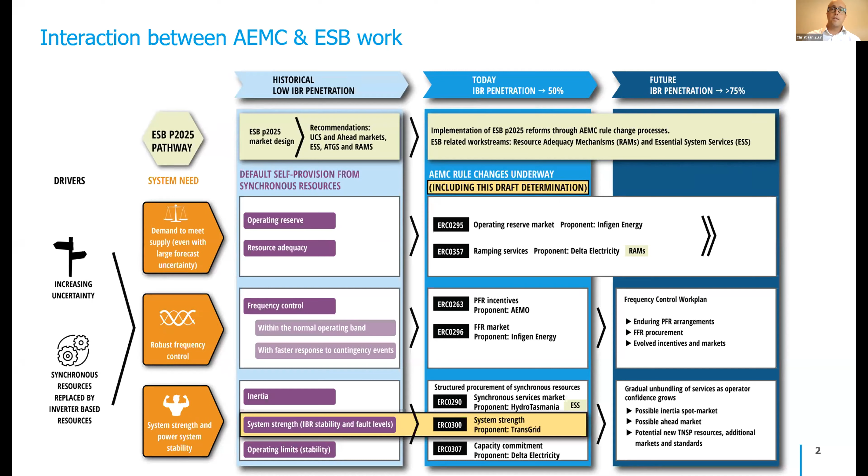So just very quickly, the work that the AEMC is doing on system strength is very closely related to the work that the ESB is progressing. There are 4 key essential system services: operating reserves and resource adequacy, frequency control, then inertia, and then the 4th one is system strength, which is about IBR-related instability, as well as the provision of minimum fault levels. And the AEMC is progressing that work through its review and then this rule change.

So there are 3 key components to the draft rule that was made a couple of weeks ago now. And these are consistent with the recommendations that we made at a higher level last year in our review of system strength frameworks. So we've divided it up into what we're calling the supply side, the demand side, and a coordination mechanism, being the pointy-headed economists that we tend to be at the AEMC.

So on the supply side, really this is about the proactive provision of system strength. So you have sufficient volumes of this critical service where it's needed, at the right locations, and most importantly, that it's there when it's needed. So you don't get the kinds of bottlenecks that we've seen with system strength over the last couple of years.

So the fundamental component of the supply side is a TNSP-led procurement or provision of system strength. And this will basically take the form of a system standard that TNSPs will be required to plan for and meet. And a critical input into this standard will be AEMO's projections of IBR connections in the future. And basically, TNSPs will be required to work closely with AEMO to proactively provide the needed volumes of system strength so that these projected levels of IBR can be expected to operate stably under normal conditions.

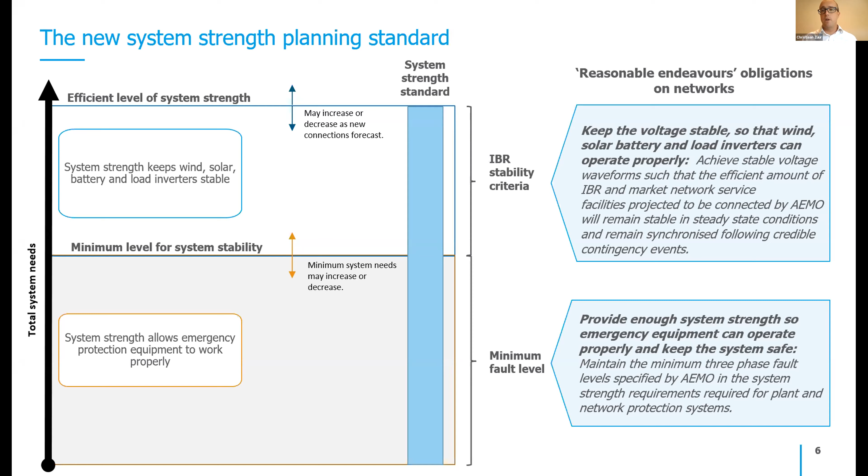The second component of what we're doing is the system strength charge or system strength mitigation requirement. Three components of the charge: the system strength price, which is developed by the TNSP providing system strength in accordance with guidelines from the AER. And that's really based on the long run incremental cost of providing system strength.

The system strength locational factor reflects the fact that system strength is a highly locational service, and that'll change according to where a generator elects to locate. The closer you are to a node where system strength is being provided by the TNSP, the lower the charge will be. Now, both of these components try to balance the need for predictability with flexibility, and so both of these components are fixed for a 5-year period.

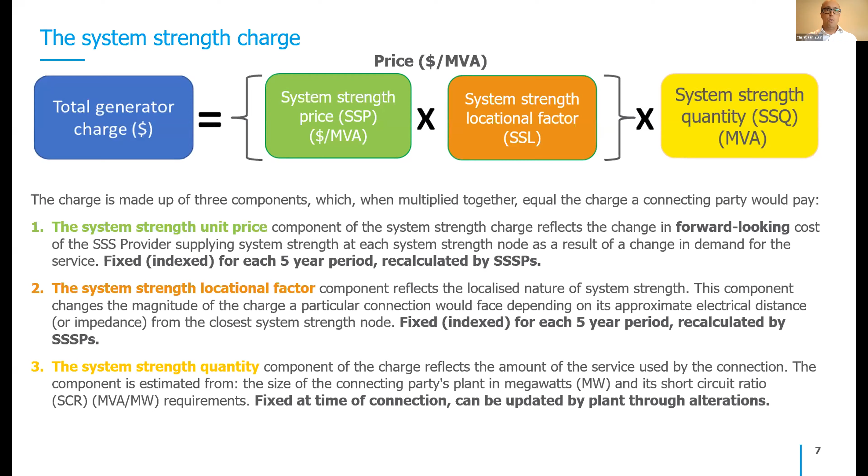The third part of the charge is a system strength quantity, which can be controlled by the connecting generator. And that's really about how much system strength the individual plant actually requires. And as mentioned, the generator or the connecting plant can actually change that by altering its plant as needed.

So fundamentally, this SSMR, system strength mitigation requirement, gives generators a choice. They can either pay the charge and make use of that centralised provision of system strength, and that means that they only need to go through the PIA process rather than the full impact assessment process, which we understand should make things a lot faster, a lot simpler for those generators looking to connect and pay the charge. If the generator elects to self-remediate, it does need to go through the existing FIA process, undertake system strength remediation works and/or contract with another party.

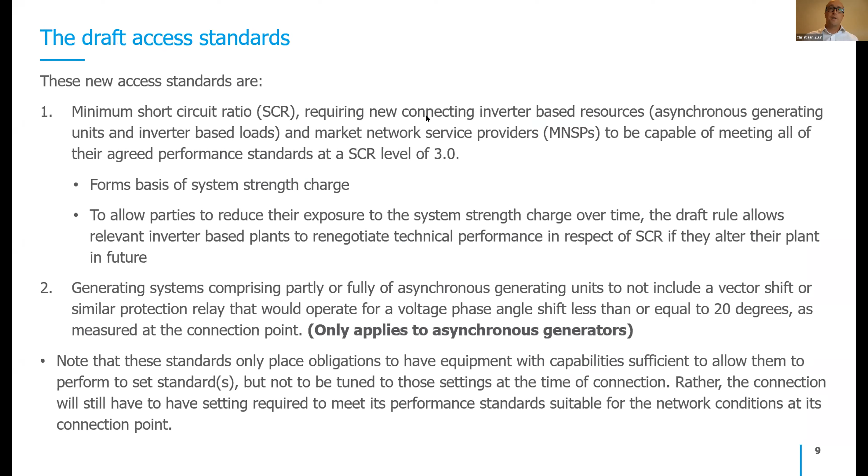Two new access standards. I won't go through these in great detail. A minimum short circuit ratio requirement for stable operation down to SCR 3, as well as a requirement on minimum vector shift protection obligations. I'm happy to talk further about these offline, but thought I might skip to the main things that I think people are interested in to talk about today.

So grid-forming inverters, we think, offer a great deal of potential when it comes to the provision of system strength. I mean, as Chris talked about here, we think that grid-forming inverters may very well provide a lower cost alternative to syncon build.

It can also allow IBR to value stack, to both reduce their own demand for system strength, potentially reducing that third component of the charge to zero, and therefore avoid having to pay a charge. It also means that the generator potentially could offer network support agreements and actually help the TNSP in the proactive provision of system strength by providing their service to help to stabilise the voltage waveform.

Now, obviously, there's still a bit of work to be done to actually allow this to occur. As Chris mentioned, there's a lot of work to be done thinking about how to standardise such a product to perhaps better define the nature of the service that's being procured. But at this stage in the draft determination, we've left it reasonably open to say that the TNSP can engage with any party who can demonstrate, in accordance with AEMO's System Strength Impact Assessment Guidelines, which is a document that AEMO sets up about how to provide system strength, that they can support the TNSP, and they can then sell those services to the TNSP.

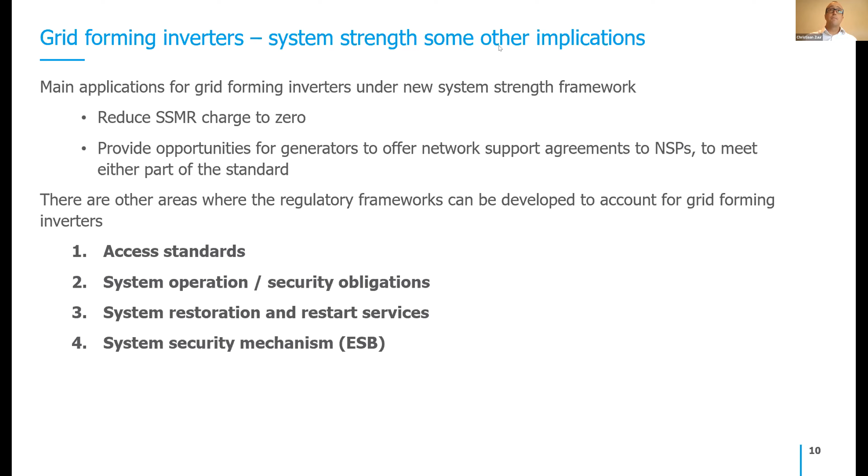Thanks, Christian. Again, I think some really timely and important work that's going on, and some clear synergies with what ARENA are hoping to do as well. So now I'd like to hand over to Dan Starrick, who's an investment director in our business development and transactions team here at ARENA, and he'll moderate the Q&A session, which thankfully we've got a little bit more time for, because Chris and Christian have gotten through quite quickly. So I'll hand over to Dan.

Fantastic. Thanks, Carl, and thanks, Chris and Christian, for some really good introductory presentations, which I think set the scene really well for the second half, as we get into some of the projects that we're going to be talking about. To set the scene at a slightly higher level before we get into some very technical questions that are coming through in the Q&A, so no surprises there.

I think the scene that's been set here is that the technology is developing fast. As we know, that's what this sort of technology does. It moves quite quickly, probably ahead of regulations. We've got the regs developing in parallel. We're talking about 2025 and really getting ready for that next phase. And the need is growing, and renewables are growing, which is obviously great, but creating challenges.

So question to maybe Chris first, and then to Christian: how important are advanced inverters in this context? We've got technology coming through fast. The regulations might take a while to really settle into what the technology can do. Can you just give us your sense of how important you think this area is? And I guess obviously very complex, but how important is it that we get this right and work together to solve these challenges? Yeah, look, I think very important is the short answer there.

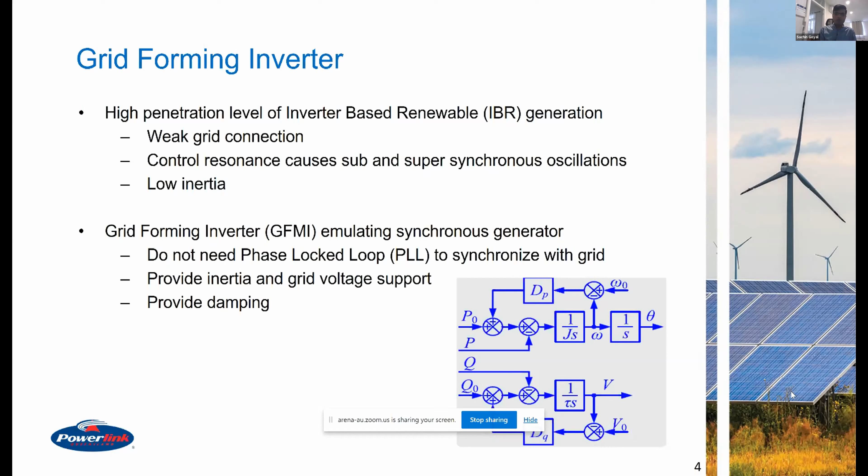It can also provide some synthetic inertia to the system, and in simple terms, it should be able to reflect the capabilities of synchronous generators to some extent. That's what we mean by grid forming. And the differentiation between grid forming and grid following here is that we are not relying on a grid to create the reference.

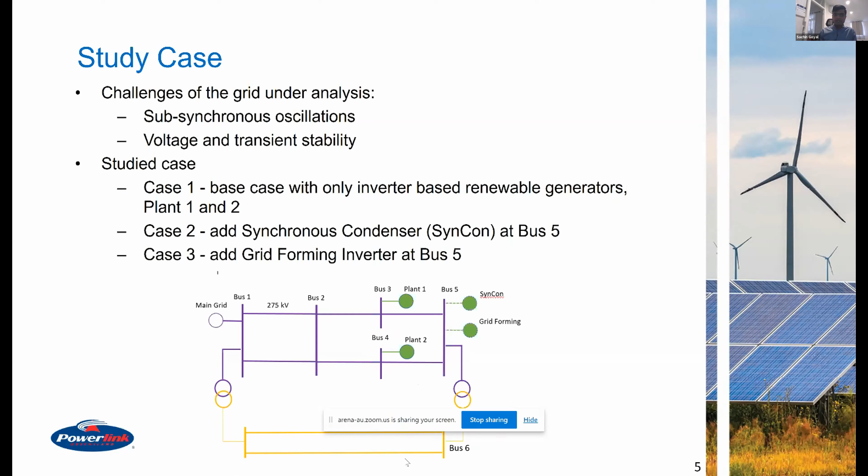In the third case, we took the synchronous condenser out and put a grid forming battery and compared: can a grid forming battery solve the problem similarly or in some cases better than a synchronous condenser? In this network, this represents the 275 kV network, and in parallel, there is a 132 kV network. In the results, I'll talk more about the impacts of 275 kV and 132 kV.

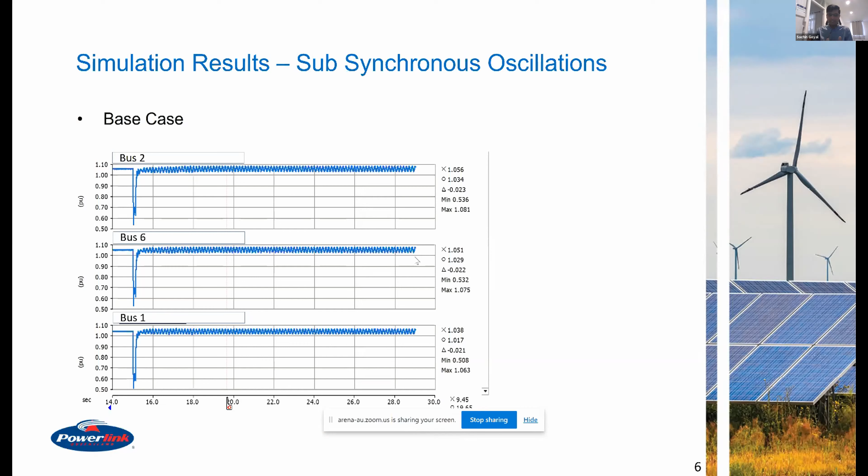Right. So when we connect a couple of renewable plants without any support, after a contingency, we see some control interactions. And those control interactions are not new to the NEM. Some of you are quite aware of those 8 to 10 hertz oscillations in the NEM. We have seen those in Queensland, Victoria, and everywhere in the NEM, right? So this is exactly what we see here.

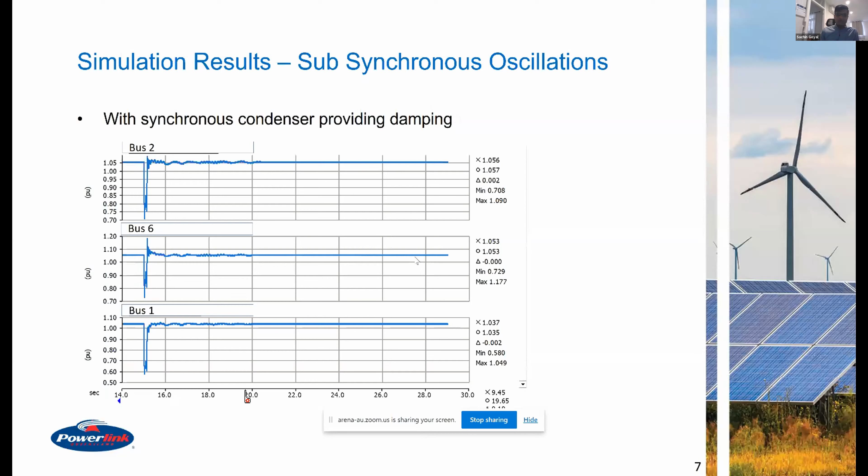And then we connected a synchronous condenser on to a close by bus, and then see, can a synchronous condenser help mitigate those control interactions, which are those 8 to 10 hertz oscillations. And as you can see from the results here, the synchronous condenser is well capable of mitigating those control interactions.

Then we took the synchronous condenser out and put a grid forming battery here. Obviously, tuning of the battery is required, as it's required for any other project, including a synchronous condenser. But what I'm showing you here is that a battery operated in grid forming mode can also solve the control interactions problem, which was solved by the synchronous condenser.

The other point I would like to mention, we did further tuning of the grid forming battery. And what we found is that if we put enough effort behind the tuning of the plant, the size of the battery can be optimized; in this case, we were able to reduce the required size by half. The initial studies were done with a 100 megawatt battery, and the synchronous condenser was of similar capacity in MVA. It was around 120 MVA.

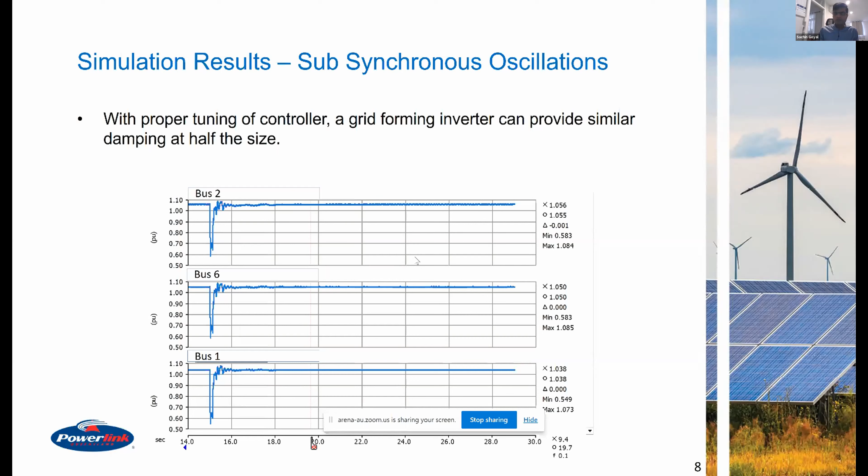But when we tuned some of the controller parameters of the grid forming battery, even with the 50 megawatt battery, we could get satisfactory results. So that highlights the importance of project-specific, site-specific tuning of the plant.

Now, so that was the one part of dealing with the control interactions. Then we further looked at, okay, can we use battery to help us maximize the hosting capacity? And when we say hosting capacity, the transient and voltage stability have always been the bottleneck of the network and will continue to be. And so what we explored here is, can we really use this technology to help us reveal some of the capacity from a voltage and transient stability point of view.

And this is the same network. So what we observed is that if we open these 275 kV lines, which basically decouples this part of the network from the rest of the 275 kV grid, it only remains connected through 132 kV, which is a very, very weak part. It becomes quite weak. In fact, the short circuit ratio in this part of the network goes below 2, right? So the stability of grid following inverters is quite compromised.

So if we don't have any remediation here, and when we trip these two lines, we have no other option than just tripping two renewable plants, because they will not be stable. Now, when we trip these two plants, it creates a transient stability problem. First, if we did not trip these two plants, power would start flowing through the 132 kV network, and it goes through a high impedance network and creates transient stability and voltage stability problems, right?

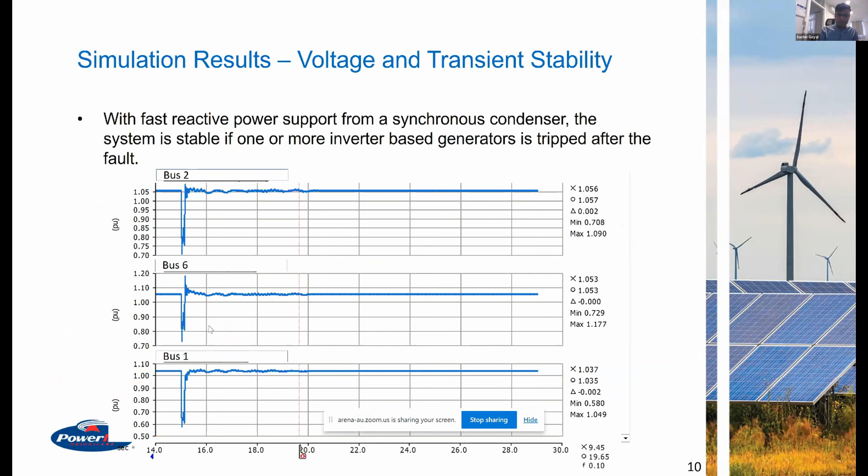But after tripping these 2 lines, we still had to trip one of the plants. We could not let both plants survive, because again, the power flowing through this high impedance line was too much and was causing the network to go unstable. Therefore, post-fault, we had to trip one of the plants for the network to survive. And those are the results we see after connecting a synchronous condenser: voltage recovers and the system survives.

So if the battery is connected here, and after a fault we forced the battery to go from discharging mode to fully charging mode, it absorbed the power from these renewable plants, right? And it bought some time for these renewable plants to gradually reduce their output and maintain system stability, because the overall power flowing from this part of the network was controlled, and hence we managed to keep the system stable.

Right. So now, can this be done with grid following batteries? This particular functionality of changing the mode from discharging to charging or charging to discharging, yes, we can do with grid following batteries as well. But as I said before, when we trip two 275 kV lines, the short circuit ratio becomes quite weak. And if it was a grid following battery, the battery will go unstable itself, right? So it won't be helpful. So therefore, in this particular application, it's important for us to use this functionality of the battery, that it's grid forming. Otherwise, it will not be able to survive these conditions.

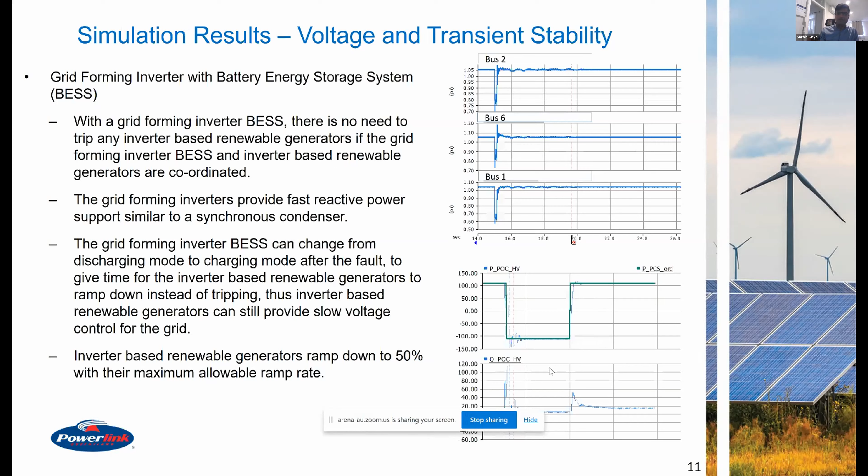And in the time that this battery bought for us, we managed to reduce the output of the renewables by 50%, and the system survived. What these slides are showing is that if we don't have this coordination of renewables reducing the active power and the battery changing its mode, then again, the system will not work. It emphasizes the importance of the coordination of the plants. If we go back to the original mode of discharging, so the fault happened here, and we forced the battery to go into charging mode, but without reducing the active power from renewable plants, if we force the battery to again pump the power, the system will go unstable again, because power starts flowing through the high impedance lines.

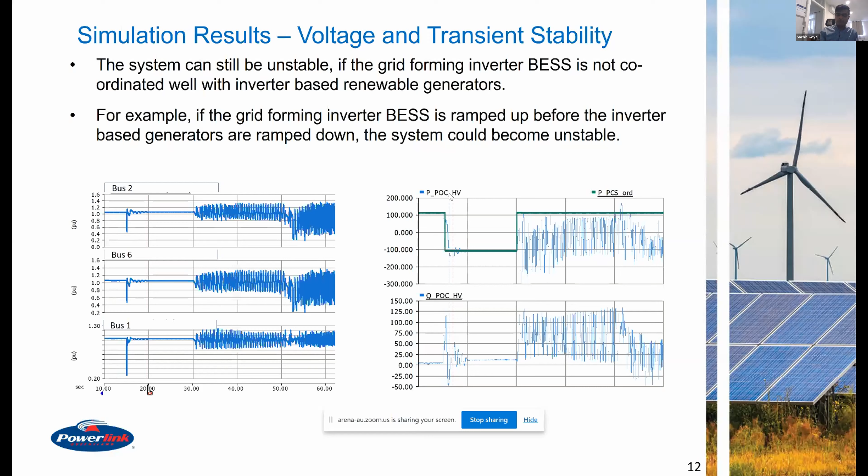And that highlights the importance of coordination in the area with the other plants to maximize the benefit of a particular plant and the network hosting capacity. So those are the test cases that we went through as part of this project. And obviously, you would appreciate that there's no such thing as a silver bullet, and so grid forming inverters also come with their own challenges. One of the challenges is that for anything to be grid forming, there's a certain requirement for oversizing, and it depends on different parameters and what application we want to use grid forming batteries for.

And to our best knowledge at the moment, grid forming is only available for batteries, either fully battery or part battery, part solar. I'm personally not aware of a wind farm, but yes, solar and batteries. Some battery is required for inverters to work as grid forming at the moment. Technology is developing, it may change in future. As I said before, the tuning of the plant becomes more critical to maximize the benefit. And then there are some limitations during the fault, how to limit the current of the inverter, because at the end of the day, there are IGBTs connected, and we do not want them to blow if too much current flows through them. I'm not the expert in that, but that's the knowledge that we got from different manufacturers, and I'm sure others in this group can talk more about that.

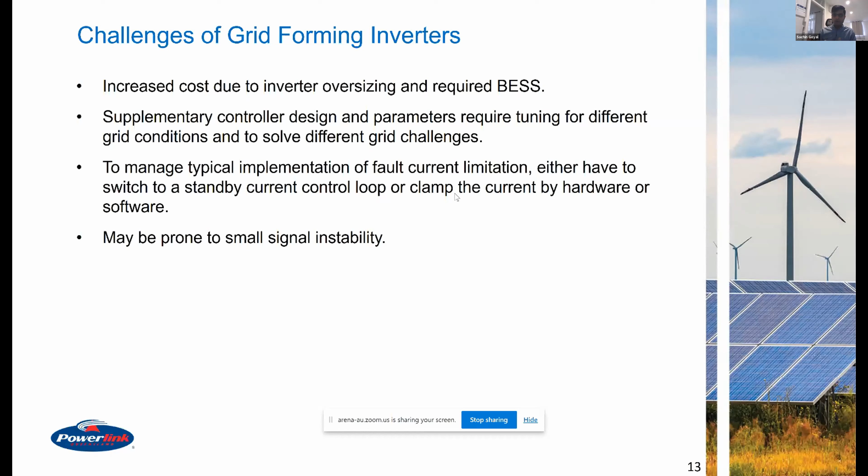So, concluding my presentation, we're quite comfortable saying that grid forming batteries can play very constructive roles enabling renewables and supporting the operation of power systems. In this particular example, we demonstrated that a 100 megawatt battery can support about 300 megawatts of IBR plants. Obviously, a thoughtful deployment of grid forming batteries with other technologies is very critical for the transition. And given the positive findings so far, the logical step would be to get a project up and running.

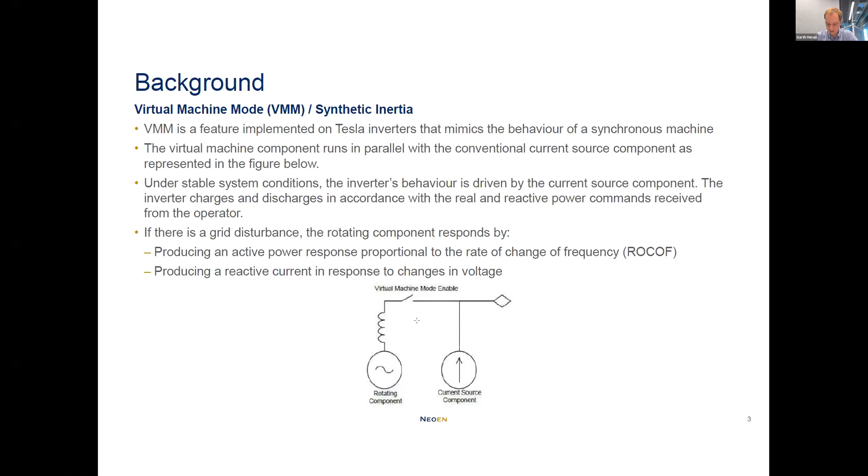So maybe just to talk about the difference between the synthetic inertia we're providing and traditional inertia. So it comes down to the physics. With traditional inertia, you have a big heavy machine, and it's spinning, and it's providing a natural power exchange when there's a rotor acceleration due to the change of frequency that it's experiencing.

With virtual inertia, we're able to provide a synthetic version of that by using a microprocessor control to mimic that behavior. And that gives us a couple of advantages. The big one is we can change the inertial constant, or we can basically change the weight of the machine and what that looks like in the grid. The other big pro is that we're able to only move into this mode when it's necessary. So you don't have to be dragging around all of that inertia, for instance, when you're trying to recover from a system event.

There is one major disadvantage, of course, and that comes down to the amount of current you can inject. The current that we can inject while we're doing synthetic inertia is limited by the inverter, typically about 1.2 times the rating of the inverter, whereas a big heavy spinning machine can typically provide 4 or 5 times the rated current. There's one little silver lining, and that's that we can produce that current for an indefinite amount of time, whereas when we have a spinning machine, obviously things start getting hot. So there is a limit to that as well.

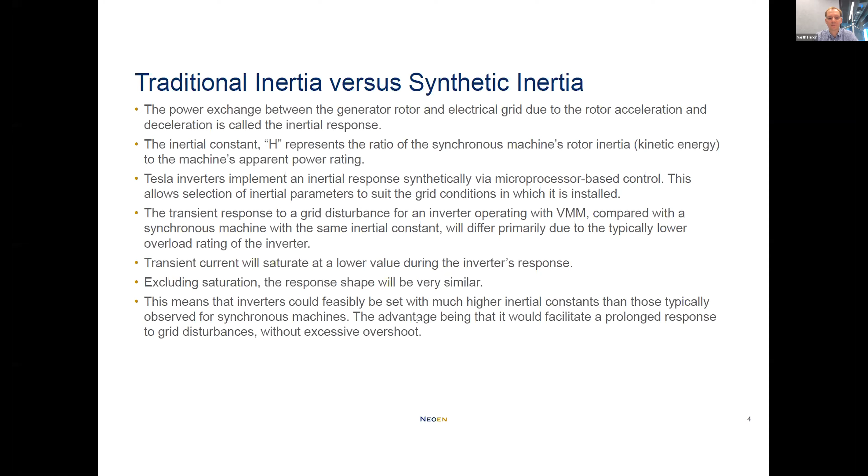So how we've gone about this, we've done a couple of things even before starting the trial on site. We did a lot of modeling, PSCAD modeling, to try to at least get the system operator familiar with what we're going to be doing when we're in virtual machine mode. And we've also been working closely with the Tesla facility in California. I think that's right, Joseph, isn't it? California facility. Yep. And they've been running bench testing. Maybe you want to talk about some of the bench testing they've been doing, Joseph?

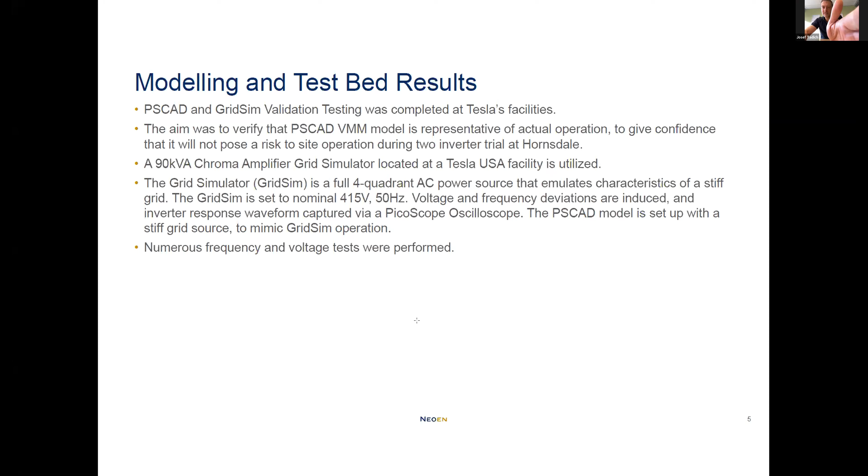Yeah, sure. So maybe go to the next slide. Well, I'll go straight into the data. So just to step back a little bit. Hornsdale is a 150 megawatt generator, and any implementation of what we call virtual machine mode, or the grid forming inverter technology, is a change in inverter characteristics and does trigger the 5.3.9 modification of the GPS process. And that's typically, in my experience, I've been through a couple now, a 12 to 18 month period roughly.

So what we did at the start of that process was we ran quite a few bench tests, and we did that at the same inverter power stage. And this is our grid simulator in California. Each power stage is roughly about 70 kVA. So we've done a few step changes in voltage and in frequency. And we modeled that against the PSCAD model in the virtual machine mode to get real confidence in the benchmarking of that.

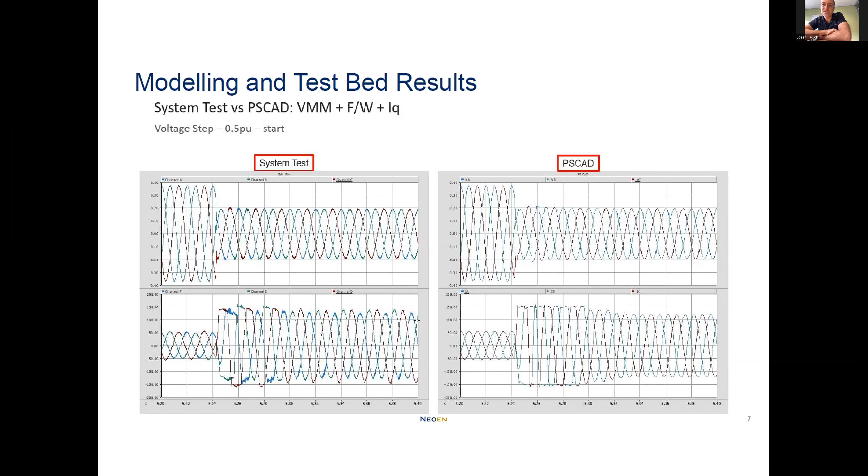So in my opinion, one of the key differences between grid forming inverters and synchronous machines is that there is a current limitation on the power electronics, where it's not the rotor magnetics which is just injecting that current. There is a physical limit on the substrate of the power electronics. So here we have the saturation, so the current will hit limit. That's fine. It doesn't trip the unit. It just means it limits the amount of reactive current we're injecting. So if you go to the next slide through there.

So we worked very closely with AEMO and ElectraNet on getting confidence in those bench level trials. And so really, for grid forming inverters, you can do a lot of bench level testing, but it's really live data which is really important. So we rolled this out to 2 inverters, and we picked 2 different inertia constants.

One, a very high one, which is not something you'd ever see on a synchronous machine. So H equals 50, and we wanted to do that so that when it was actually in service, in smaller disturbance events, we could actually measure and see. And then one closer to what we wanted to adopt, which is H equals 5, which is comparable to a traditional gas peaker, which is really what the batteries are replacing in the market. And you can also change the rotor damping as well. I'll hand over to you, Garth.

No, sorry, Joseph. I was just going to say, I think at that inertia constant of 5, if we roll that out across 150 megawatts, we'd be providing roughly a quarter of South Australia's inertia requirements. So the H equals 5 at Hornsdale is about 1,000 megawatt seconds. Yeah. Right.

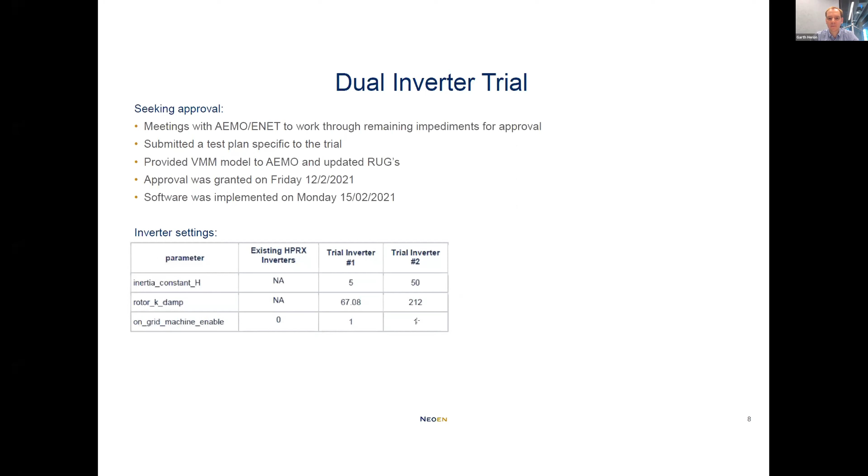Yeah. So we've been running these trials since February, and we've actually captured several events that have happened in that time, and we'll go through those a little later in the slide pack. But one of the things, of course, that we have to do when we're running these trials on two inverters on site is we have to meter them. So we've been using these SEL meters, and they're extremely fast, and they've been very good at capturing the events, although what triggers them has also been one of the challenges that we've faced, and we'll probably talk about that in a bit more detail as we go through.

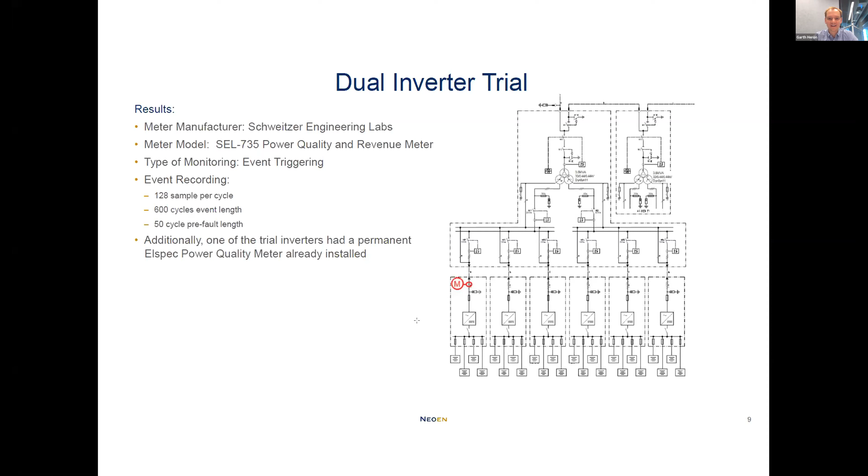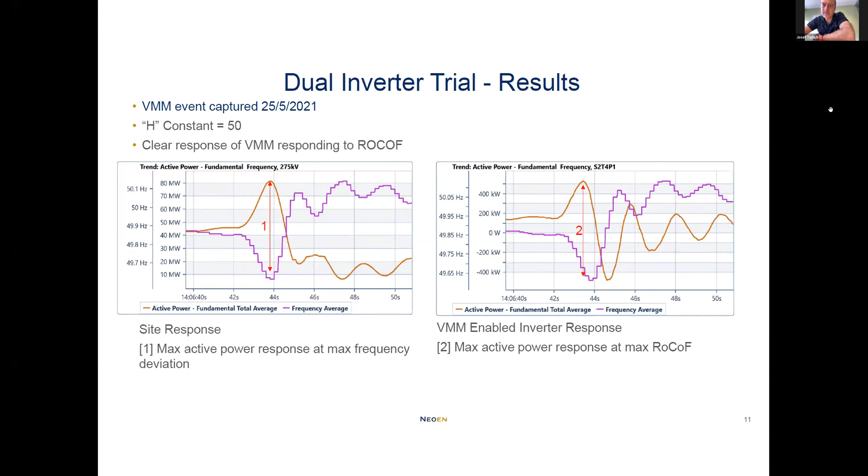Back to you, Garth. All right. Well, I guess no trial would be complete without facing its fair share of challenges.

And we have so far faced a number of challenges. So, one of them is really around the SEL meters, which are absolutely brilliant meters, but they collect an enormous amount of data. But also the events that we are trying to capture here are extremely fast, and trying to trigger the meters to collect the data is very difficult. Either the settings weren't sensitive enough and we were missing events, or we were setting them too sensitive and they were just filling up with data, which was not an actual event.

So we've been working on other ways to continuously recycle, I guess, the cache in the meter, and then capture it when something has happened. So make sure that we save the data after an event, and that's been one of the more tricky parts of the trial so far. Joseph, you got more to add on that?

Yeah. I mean, really, Garth, you captured it. It's actually really hard in an actual full field trial to catch data which is very small changes. So we are working on distinct triggering to actually launch the SEL meter. We're working actually with SEL themselves to capture this. But the big events like we saw on Tuesday, we can capture that sort of data. It's hard to catch the smaller stuff.

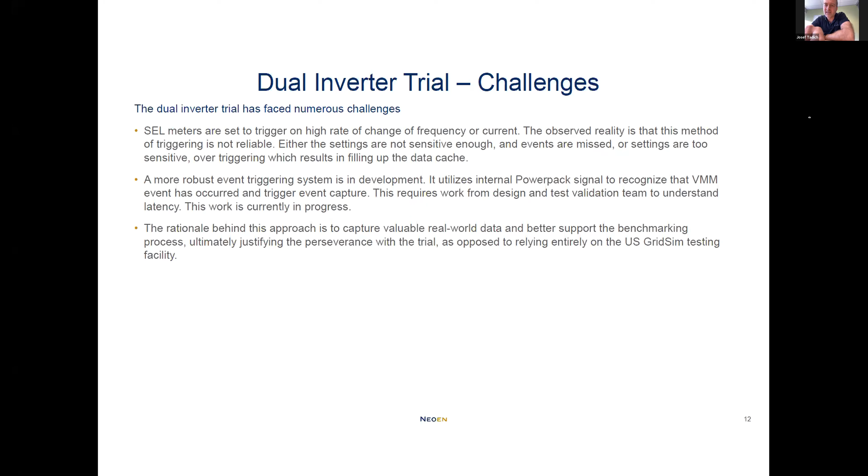Yeah. And then of course, one of the other issues that we've struck is really with some unintended consequences of the hardware and software that really exists. which started as a home-based system, I guess. And so we've actually found a couple of harmonic issues while operating in virtual machine mode. So one of them is associated with probably harmonic over filtering, and the other one is a bit of a frequency wobble that we've seen, which is driven by the anti-islanding software that we think is already in the inverter. Joseph?

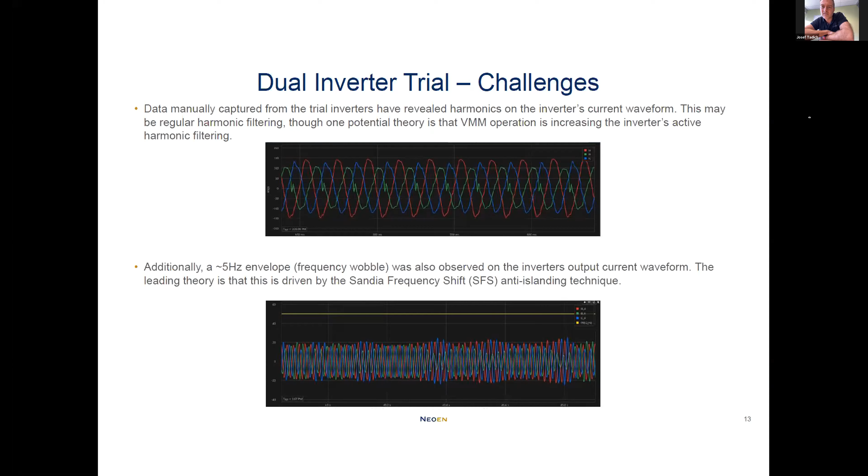Yeah, correct. So all of the Tesla inverters which we sell onto the market are actually grid forming, but it's really a firmware enablement to operate them in a virtual machine mode, because the same inverters are operating in backup and microgrid, which is effectively all a grid forming application. So one of the things we do when we go to a current source, and for a lot of grid codes, is we actually have an active anti-islanding, because we don't want to be generating in an island. So we do purposely try and wobble the frequency to see if it does change, to shut down. That bit we're now disabling on the Hornsdale inverters, because it's not really relevant on those large scale projects.

Thanks. Yeah, so I guess as a result, this is what we're planning to do. We're doing some new tests with our virtual machine mode on, but we're going to be switching off the SFS, which will hopefully cure some of those issues that we're seeing around harmonics and wobble.

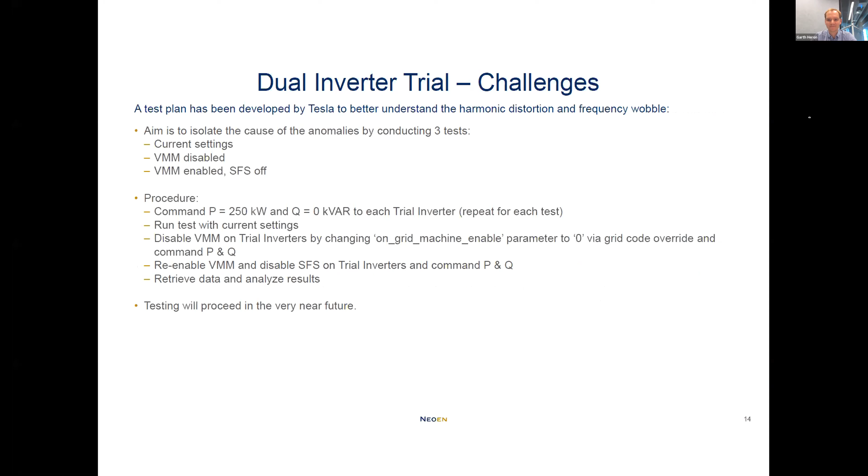So what are we doing next? The whole idea of the Hornsdale virtual inertia trial is to be able to roll it out right the way across Hornsdale Power Reserve, and that includes the original 100 megawatts as well. So we're looking at doing a whole 150 megawatts of Hornsdale, all with this virtual machine mode capability. To do that, as Joseph mentioned, we've got to get through a 5.3.9 process. So we've got a few more studies to do, and we are working on a package. We hope to do that later this year, and there will be a few additional bits of testing that we'll have to do in order to get there.

But look, basically we're on track. We're hoping that this will be rolled out across the full battery in future, and these results that we're seeing would, we think, help to stabilize the network in a way that isn't currently being done from large batteries. So it's really taking that next step. With that, maybe questions, or if Joseph has anything to add.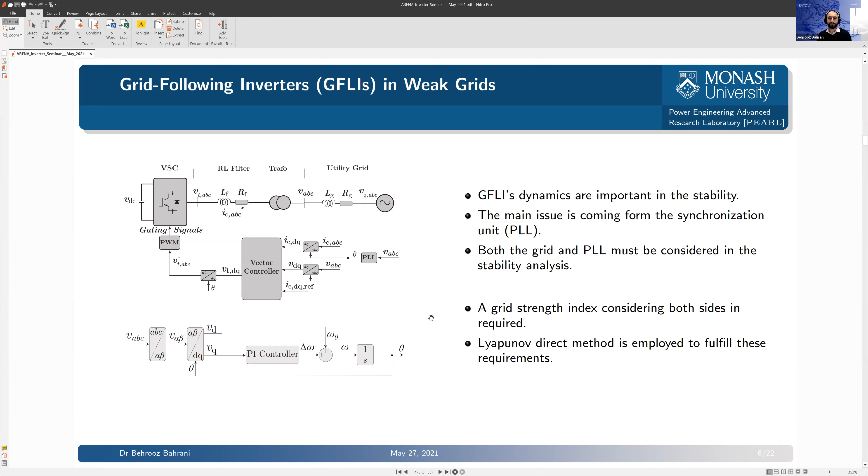So we have tried to use Lyapunov theorem to understand whether we can define an index for grid following inverters to understand under which scenarios they will be unstable. We successfully proposed a Lyapunov function, found the domain of attraction for this system, and came up with an absolute index that can tell you whether your inverter operating in a particular grid will be stable or not. This index depends on all of the parameters in your system. It is no longer only looking at the SCR or impedance of the grid.

Of course, it takes that into account, but it also takes into account the coefficients of the controller, the coefficients of the PLL, and the current control, everything. So it's a combination of all of the factors that play a role, and gives you a very accurate indication of the stability of your system. We published the results in the paper below, so this is already available in the public domain. If you're interested to know more about this index, you can refer to this paper.

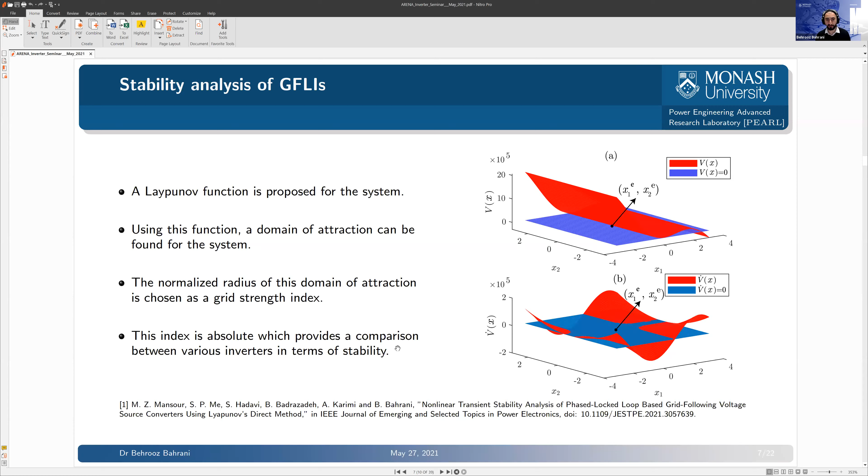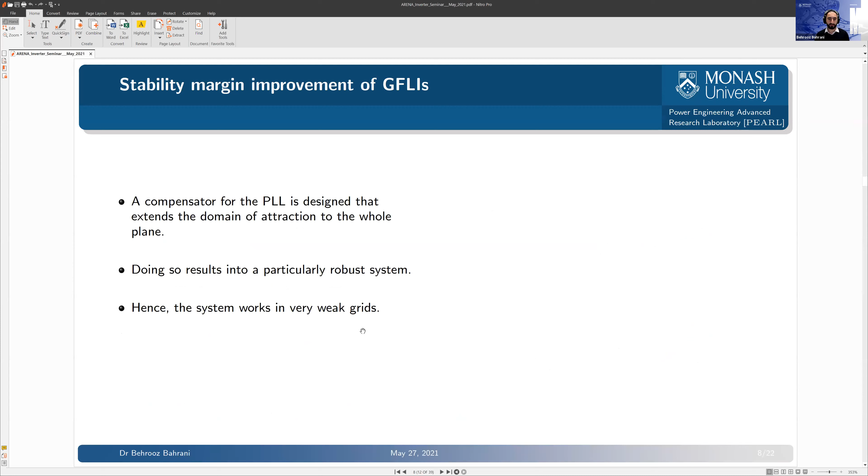Of course, I need to acknowledge that one problem with this is that you wouldn't typically have access to the coefficients of the controller. But if you are a manufacturer, this is your own PLL and you're developing your own control strategy, then you can use this to understand whether it is stable or not. Additionally, we came up with a compensator for the PLL, and this compensator can give you a very robust performance with respect to grid strength variations.

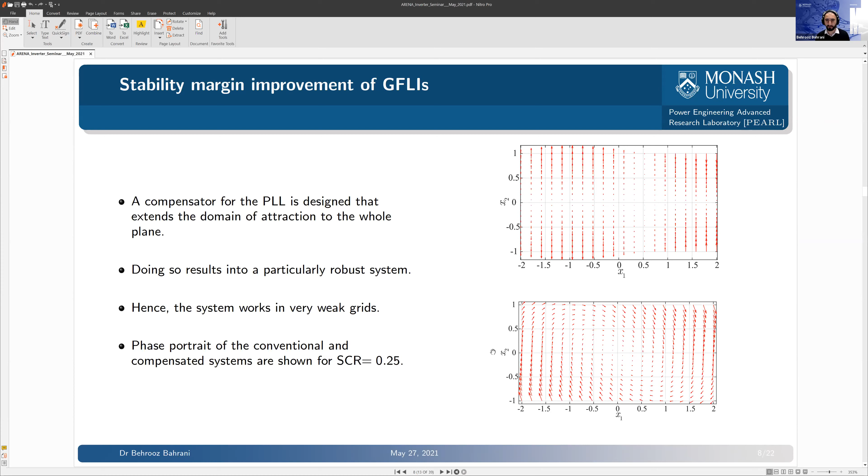What I'm showing here is the phase portrait of an uncompensated PLL at the top and the compensated PLL that we designed. And this compensated PLL can give you a very, very good performance in very, very weak grid. SCR 0.25 here, still it is stable, still it won't be unstable with this adjustment that we've done to the PLL. The results of this hopefully will be published soon in a journal paper.

But I guess the flavor of the month is more on grid forming inverters, and we understand that we are actually moving towards a future grid with grid forming inverters. And we have been working on grid forming inverter control to see whether we can actually come up with better control strategies. What we've seen so far today in the seminar has been mainly around this technology here, in which you are hoping to have a grid forming inverter which would mimic a synchronous generator.

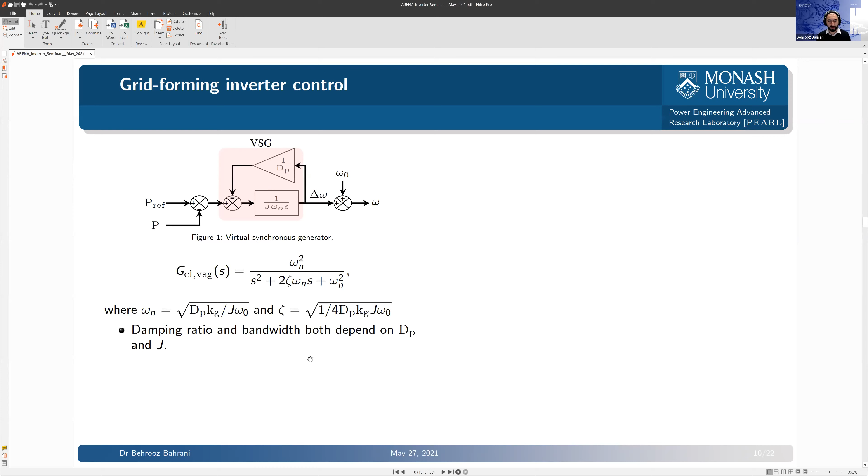You're hoping to have control loops which are essentially identical to a synchronous generator, and you can have a damping ratio, and you can have a moment of inertia in your system, and this will be more or less what you will be getting. You can change different parameters in this structure. You can change your damping ratio. You can change your omega n, which is a function of your damping ratio and moment of inertia, and you can tune your virtual synchronous generator, and that's fine. And this is what we are doing at the moment in most grid forming inverters.

And this would be what you get in an islanded mode of operation. So in the islanded mode of operation, if you want to have a better RoCoF, you will sacrifice your transient response, your dynamic response in grid connected. And you don't know when you will be operating in grid connected and islanded. You can go to islanded and you're expected to still work there. So if you want to have good performance in both islanded and grid connected, there's always a compromise. So you have to choose what you want to do.

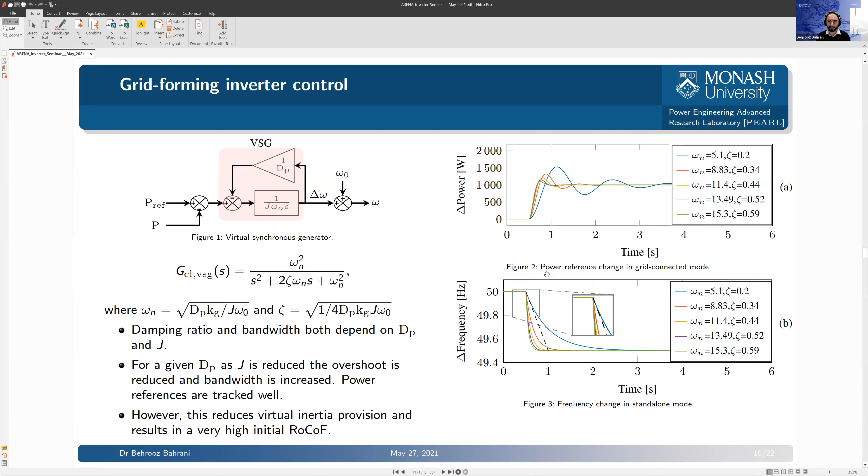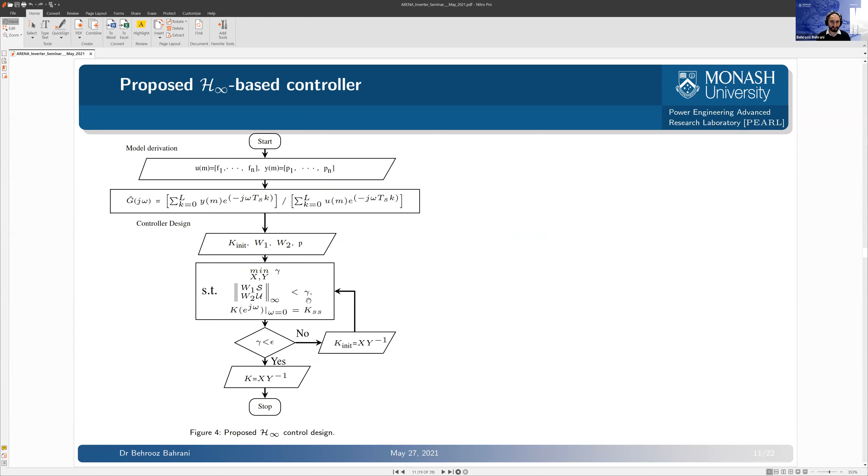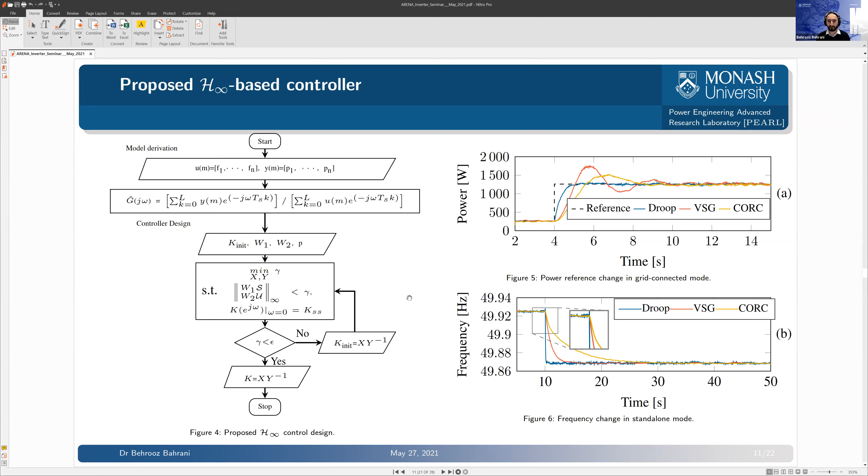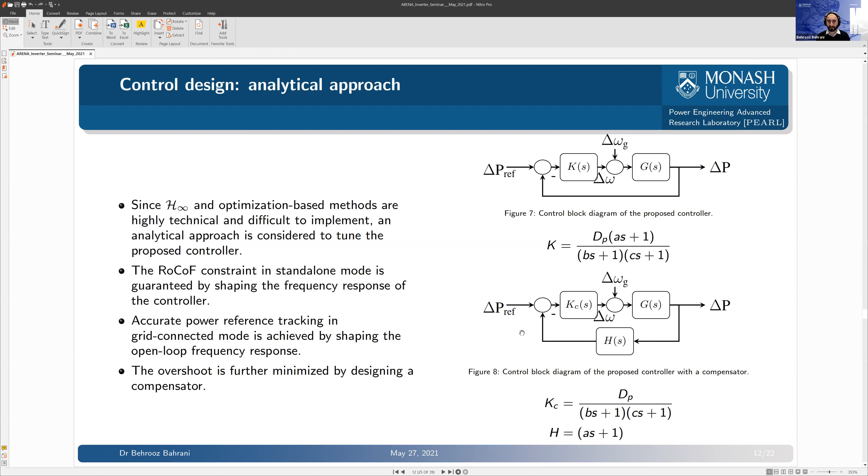Now, of course, this might be a little bit difficult to design. The design procedure is not easy. We acknowledge that. And we are working on another variation of this method that is based on an analytical approach. So you can write maybe only a few lines of code, and based on a few equations, you would be able to come up with this controller here, which would be your active power controller in your grid forming inverter. And it can give better performance, even better than what I just proposed, by a tweak. Stay tuned. All of this will be published very soon, on our website, and of course accessible online, most likely via IEEE.

Now, another aspect of grid forming inverters that we've been working on has been their transient stability improvement. I was very happy to see when Sachin was introducing the results that they had some oscillations upon fault clearance.

That's actually a problem in grid forming inverters. If you do not properly damp your system when you're recovering from a fault, you might have some oscillations, and these oscillations can have different reasons: if your controller is not properly tuned, or if you're operating a weak grid. So these are the oscillations that you might get depending on your grid strength, depending on your controllers. You will have these oscillations, and they will die out eventually, but you won't get a fantastic result.

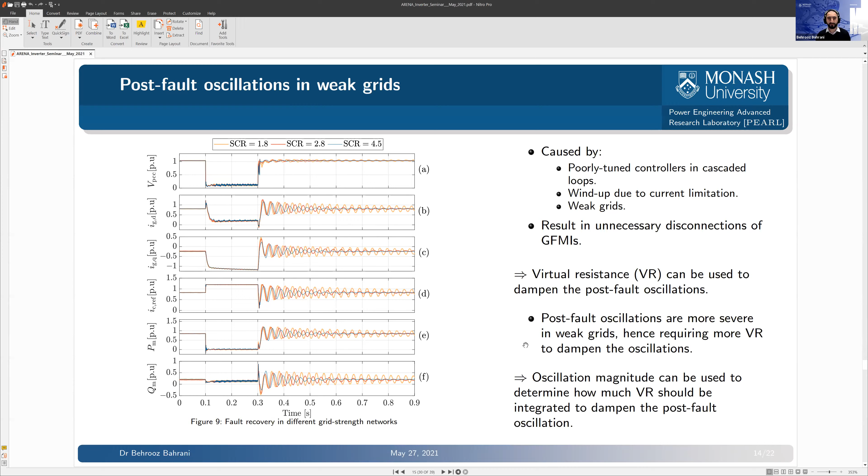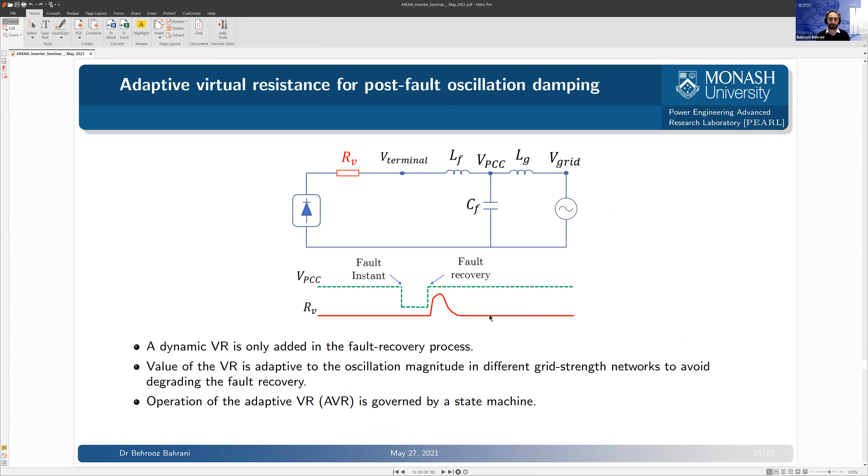So what you can do here, you can have a virtual resistance added to the control loop in order to get rid of these oscillations. Previously, mainly people, when they put this virtual resistance, they put a constant virtual resistance and then they phase it out. But what we have done, we have come up with a methodology to have an adaptive virtual resistance. So when the fault actually recovers here, we adaptively change this virtual resistance in order to support our grid forming inverter to recover from the fault without excessive transient.

I have some results here to show you. So this is when you do not have any virtual resistance in the network. You actually recover from the fault and you have these oscillations, but with the virtual resistance that we have proposed, you almost don't see any excessive transient, and very smoothly you will recover from the fault, and you won't see any oscillations that are sustained in the system.

Also, this one will be published. It is under review, and I believe the results can be accessible within a month if everything goes well. And you will be able to find the paper on IEEE. And of course, we will publish all of these on our website, and I'll introduce the website at the end of the presentation.

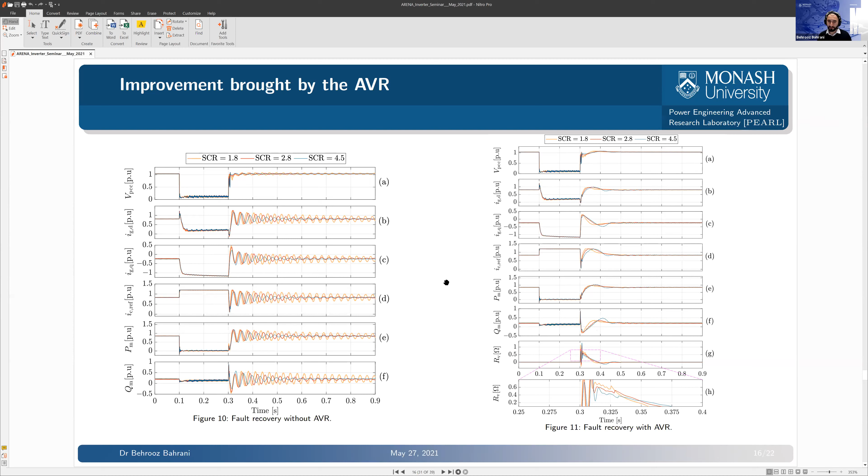The last bit that I would like to talk about is synchronous condenser control and allocation that we've been doing. We acknowledge that in addition to grid forming inverters, still a great deal of discussion is going on about synchronous condensers, and we want to know whether we can better control them, where we should allocate them, and what size we should actually have for them.

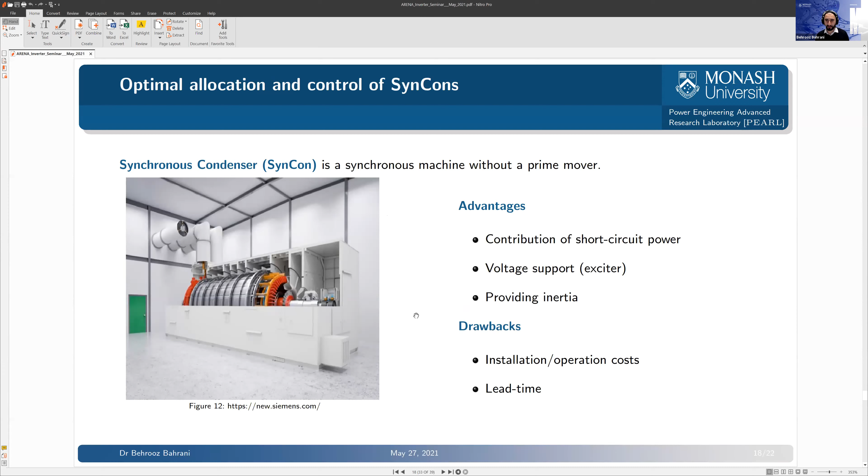The synchronous condensers that we have been working on have been using an exciter AC1A, and what we have done so far, we have tried to come up with a better exciter control for our synchronous condenser. So the results show that if you manipulate the controller rather than only having a simple first order controller, if you come up with higher order controllers, it can significantly improve the performance of the synchronous condenser, in particular in weak grids.

And then also we have been trying to understand where we should actually allocate these synchronous condensers, and which size of them in the network. So two studies have been done. One is the optimal allocation and sizing. We've done two sorts of allocation and sizing. One is using heuristic algorithms, which will probably not give you the best result, but we have actually extended the studies to a convex optimization approach.

And we are almost done with this study. We have presented the results to our partners, and we will very soon also publish this on our website. So you can actually have a very nice procedure to size and allocate your synchronous condensers in the grid. Another study, like I said, is an exciter controller for synchronous condensers, and the exciter that we have designed outperforms the existing and conventional exciters, and it can give you much better performance in weak grids. Also, the results of this one will be published very soon, and you can find all of them on our website.

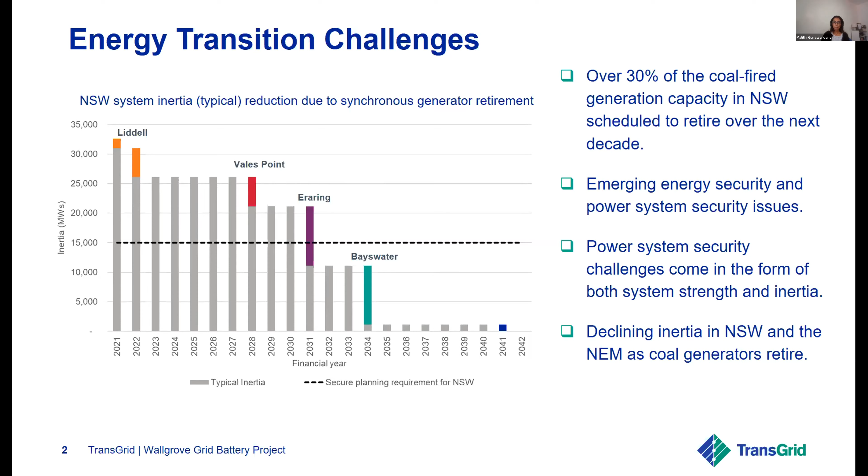We see that the production from the coal units is becoming increasingly intermittent in response to low wholesale prices, particularly when the renewable resources are abundant. So this leads TransGrid to believe that there will be an inertia gap declared for New South Wales well before 2030. Under the National Electricity Rules, TNSPs have the responsibility to source solutions for inertia at the time AEMO declares an inertia gap in the region.

So under the National Electricity Rules, TNSPs have the responsibility to source solutions for inertia, like I said, at the time AEMO declares an inertia gap in the region. So as part of determining how best to address the inertia requirements in a cost-effective way, TransGrid is investigating new technologies to meet these challenges. So in particular, we've identified batteries as an emerging solution with the potential to support frequency control in the future, but also in satisfying the secure level of inertia requirement.

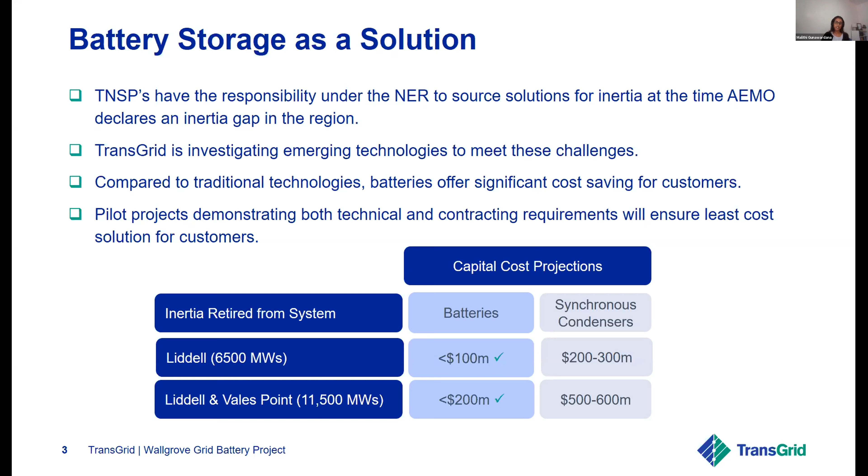So compared to traditional technologies like synchronous condensers, batteries can offer multiple complementary uses and are expected to be a low-cost solution for customers given their ability to provide both market and also network services. So this allows the cost of the investment to be shared between networks and generators, reducing the potential cost burden for the customers. So I guess this paves the way to Transgrid undertaking the Wallgrove Grid Battery Project with joint funding from both ARENA and the New South Wales government.

The key objective of the project is demonstrating the use of a grid-scale battery with advanced inverter capabilities to provide not only fast frequency response, but also synthetic inertia services to the New South Wales transmission system. Our expectation is that the project will serve as a pilot project to show whether a grid-scale battery can be used to effectively address the emerging inertia gap in a cost-effective way by supporting a cost-sharing model between

networks and market participants. But since this is the first grid-scale battery in New South Wales, for Transgrid, it is also an important learning process in terms of understanding the technology, the limitations as well as the capabilities, and also the complementary services it can provide to the network. It will also provide us, Transgrid's planning team, with better data to support future battery projects connecting to the New South Wales network. So just to give you an overview on the Wallgrove battery.

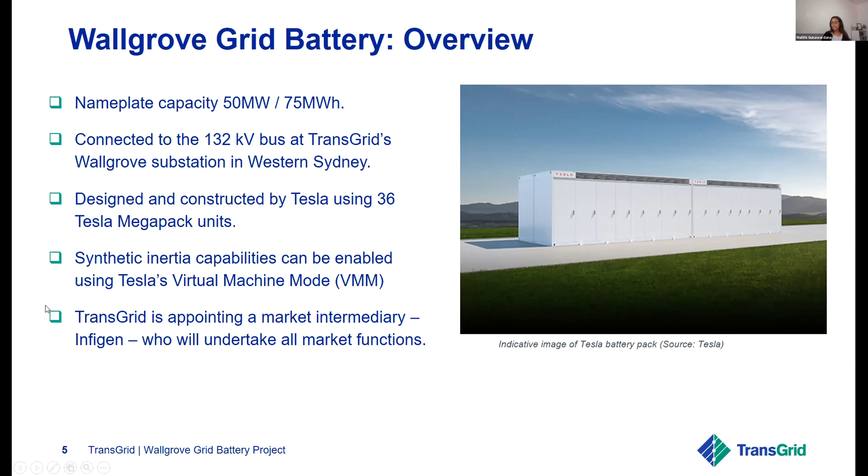So I won't delve too much into the virtual machine mode, as this was already covered by Garth and Joseph in detail in the previous presentation. But as Garth mentioned earlier, the virtual machine mode of Tesla inverters uses specialist firmware to mimic the swing equation that governs the rotor dynamics of a synchronous machine. So as the inverter's inertial response is created by the inverter controls, the response is configurable and can be modified based on the network's need.

So this is an advantage over traditional synchronous generators that have a fixed inertia constant based on their mechanical or physical characteristics. But obviously, the bottleneck for the inverters is, as mentioned before, the current capability limitations. For the Wallgrove BESS, this virtual machine mode will be enabled as part of stage 2 of the project via the 5.3.9 process.

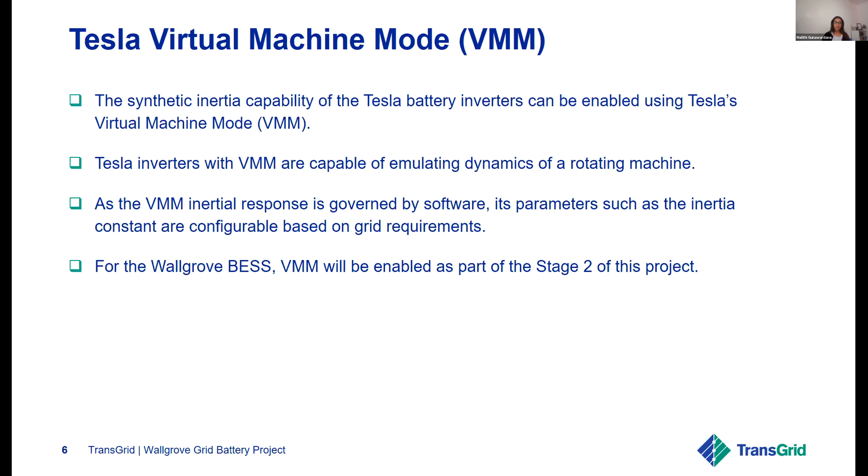In terms of where we are at with the progress of this project, overall the project is progressing well and is on track for commercial operation towards the end of this year. So we achieved a major project milestone in early May with the approval of performance standards and the issue of the 5.3.4A letter by AEMO and the subsequent execution of the connection agreement. Wallgrove is in fact the first battery to reach committed status in New South Wales.

Looking ahead, registration of the battery is expected to be achieved by August this year to enable the commissioning process. So we're looking forward to testing this battery and having the battery operating in the network in grid following mode by October. And as I said before, stage 2 of the project will then be enabling and testing the virtual machine mode, which will be started around November to December this year.

But beyond this normal generator connection and commissioning process, we also plan to have an ongoing performance monitoring and testing process for the Wallgrove battery. So we'll be monitoring the performance of the BESS over a period of time and measuring the battery response to actual system events. So typically a system event likely to invoke a response from an inertia source like this one would be a considerable frequency deviation like what we experienced a couple of days ago, a loss of a large generator or a load, or a system separation event.